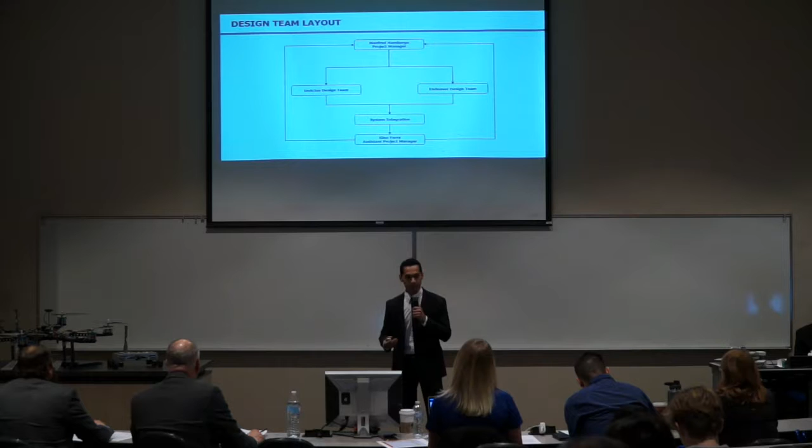As mentioned in the introduction, our mission is Rogue One, which stands for Reconnaissance Operation for Guided Unmanned Exploration 1. Our mission purpose is to develop an unmanned aerial vehicle that will transport a reconnaissance vehicle to a remote location. It will survey it, then return to the aerial vehicle, and together they'll return to the starting location. For our mission, there are three corresponding systems.

It's the ground station system that we'll be talking about today during this presentation. We have our Vesta system, which is our hexacopter over here on my right; this system will be covered at 9:15 today. And finally we have our Aura system, which is our rover, also here on my right, which we'll cover at around 10:15 a.m.

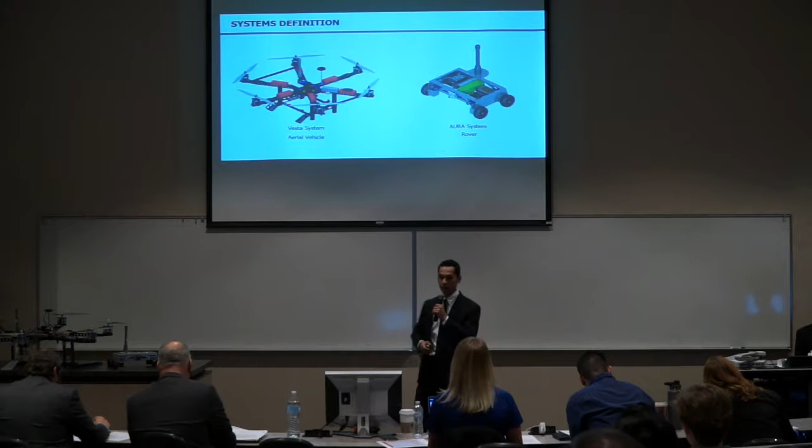For our mission, we have developed 8 primary objectives that dictate the progress of our mission and the progress we have to take with our vehicles. Starting with, the Aura and Vesta systems should be initiated at the center of the Mos Eisley spaceport, which we refer to as the location where both vehicles will start the mission.

Our Vesta system, our hexacopter, should transport the Aura system to the Yavin 4 ruins, which we refer to as our operations area. At this point I hope you're all familiar with these terms—we are very fans of Star Wars, so we adopted a lot of their names.

Our third objective is that the Aura system should be deployed after the Vesta system has landed in an approved landing area. The Aura system should navigate the operations area, generate detailed images, transmit the visual data to the ground station, and then return to the Vesta system after this data has been transmitted.

Finally, we have our Vesta system that should transport the Aura system back to the starting location after the Aura system has returned to it.

We also have 4 constraints for our project that dictate the limits within our project. For example, our cost will be less than or equal to $3,800, a total mission duration less than or equal to 60 minutes. The Vesta system will land in a grassy portion of the operations area, and the Aura system will only navigate that grassy portion in the operations area.

Now I would like to introduce you to our concept of operations. This is a simulation we've developed to represent the progress of our mission, starting with phase 1, our pre-flight phase. During this phase, we'll have all of our systems—could you play the video, please?

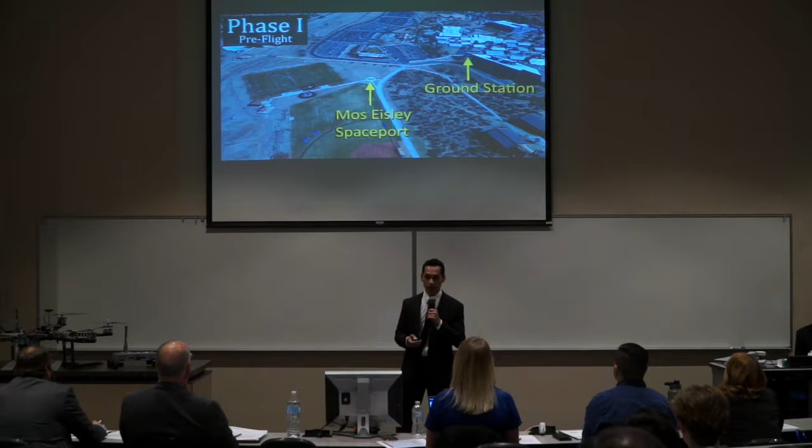Thank you. So we have our locations that I just described. Our ground station will be located here in the conference room in this building, where we set up all the equipment that belongs to the ground station and that will allow us to communicate with our vehicles. The Mos Eisley spaceport, as I mentioned, is where both vehicles will be set up and will start the mission.

Our Yavin 4 ruins is the operations area that the Aura vehicle has to transmit video from. And we have this hyperlane marked here with 2 lines that depicts the bounds that the Vesta system has to fly within.

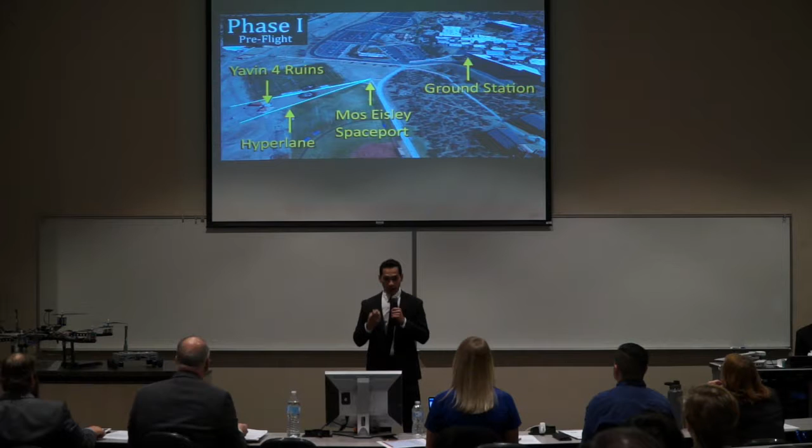Moving on, we have our Phase 2 of our concept of operations, the transport to Yavin 4 ruins. In this phase, the Vesta system takes off from the starting location while carrying the Aura system, and they will navigate or fly through the hyperlane that was just mentioned to land and softly land.

I should emphasize on that—softly land, so that it can deploy the Aura system.

Phase 3 is the deployment of Aura. Through our safety mechanisms, there is a setup of servo motors with foam blocks that lock the Aura system in place. They will be released, and then the Aura system can drive out of the payload bay.

Our Phase 4 is the reconnaissance of the Yavin ruins. This is just a simple area that we reconnoiter, and while transmitting visual data, we have a camera mounted on the rover that will be providing the visual images for the operator to manually navigate the operations area. Once it's done, it can find objects of interest that we're interested in.

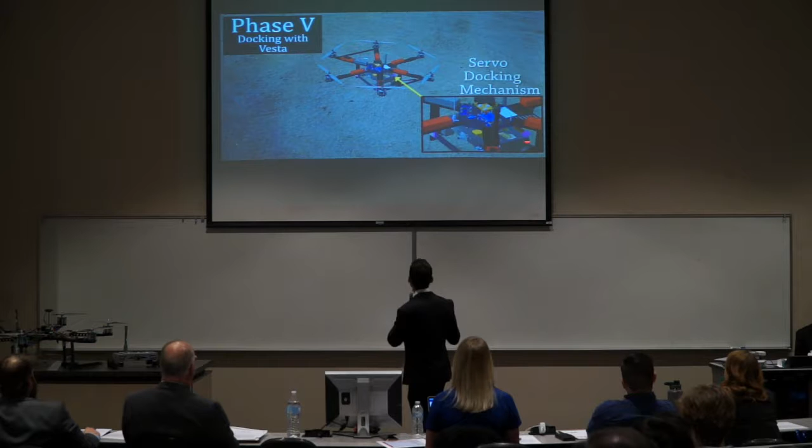In Phase 5 is the reverse process of Phase 3. It just has to dock with Vesta again by driving up the payload bay in the Vesta system, and then will be locked into place with the same mechanism in reverse. The servo motors will just lock in place to hold the Aura system during flight.

Phase 6 is the reverse process of Phase 2, a return to the starting location. Through the same hyperlane, the Vesta system will perform a second flight to bring back the Aura system to the starting location. Also, it will finish with a soft landing.

And finally, our Phase 7 is our post-flight phase. At this point, we disassemble all the systems, we're done with our mission, and we're ready to analyze the data.

Now, our mission history. During the following slides, I'll be presenting you with some changes that we had to perform to our mission due to setbacks, issues, or problems that we encountered during our project.

For example, our first two objectives that I presented a minute ago, which dictate the location we're going to use for our operations area and our starting location, had to be modified due to the following reasons that I will take you through. Our mission location 1 is very similar to what we ended up doing, with the exception that we planned for this location for 28 weeks.

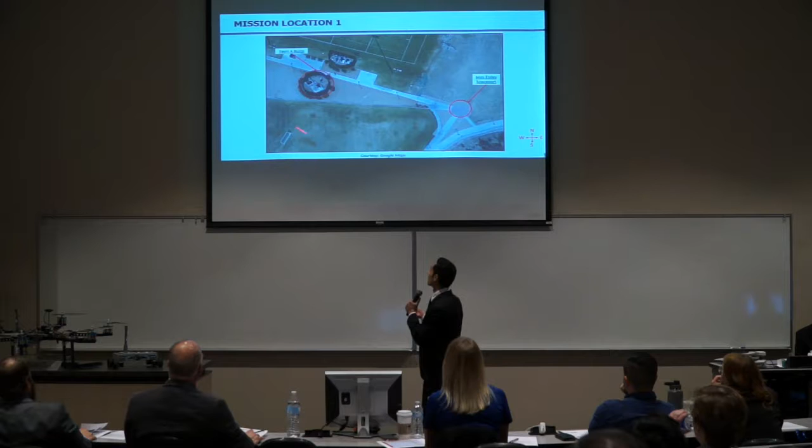We designed our system to take off from this area to land in this enclosure, and then we would be reconnoitering. Unfortunately, the facilities department denied the use of this enclosure due to concerns for damaging their equipment.

Again, I would like to emphasize that we designed for 28 weeks our project for our vehicles to operate within those bounds, and we were not able to use it.

So we came up with other suggestions and proposals, such as mission location 2, which is also within campus enclosures. We have our new landing site and our new starting location in the Spurance House. This is a house that is available for guests at the university.

This is a storage location that they use for facilities as well. This was a perfect area, also next to the house of the Chancellor. We have a pretty good view of our vehicles. This was a perfect location.

Unfortunately, our ground station system was designed to communicate at the initial area that I just presented, but for this location, it couldn't secure a link for connection with our vehicles.

So we were forced to move again with our location. Location 4 was the soccer field. We again had a proposed takeoff and landing area, and unfortunately we were not authorized by the athletics department to use this location.

I should mention that, as you can see, all of these locations are within the campus enclosure. Our decision for these locations was that we wouldn't like to be liable for any damages to people or property if we were to perform our mission outside of campus.

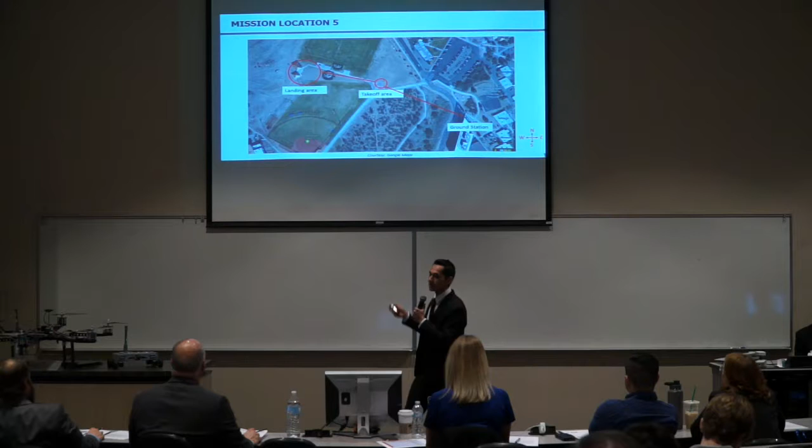And we just pushed the landing area over to this side, which was a publicly available area for us to use.

Now, our systems also have their own history. For our vehicles, mainly, we went through a series of modifications and changes that we had to perform due to testing, analysis, and simulations that we came up with to solve problems that we encountered. So, for example, beginning with the Vesta system, the hexacopter, it started with version 1, our very first CAD model of the Vesta system. It was an octocopter that was just capable of taking off and carrying the AURA system.

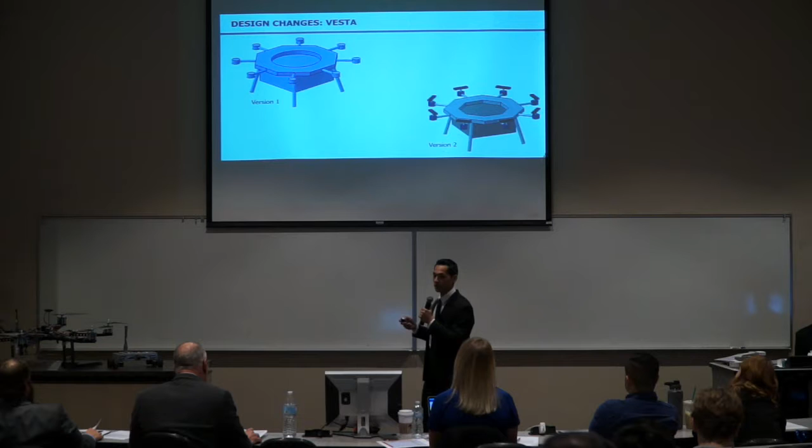Version 2, we decided on the selection of electric motors and propellers for our propulsion system, and we also have a payload bay for the AURA system. Version 3 focused on designing an accessible payload bay for the AURA system. Version 4 refined the aerial structure and the landing legs.

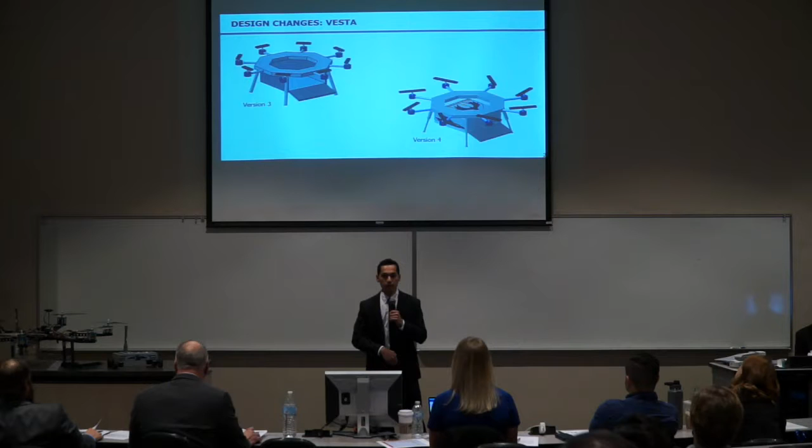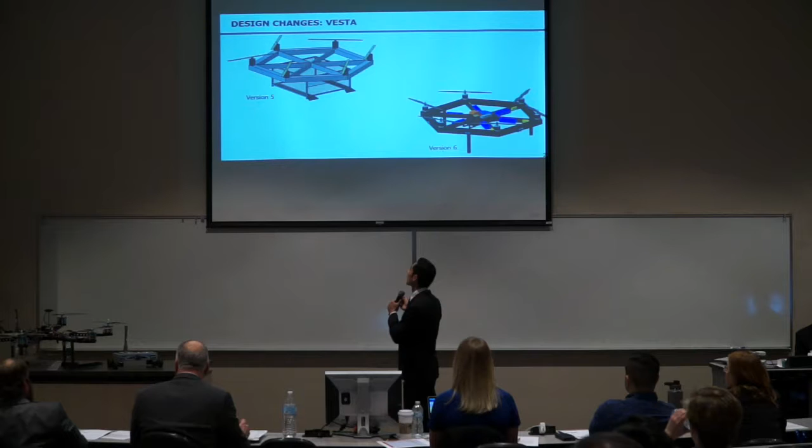Version 5 went from an octocopter to a hexacopter and focused on a closed shape for the aerial structure, and also a lightweight payload bay for Vesta for the AURA system. Version 6 focused on the weight problem, so we went with a carbon fiber layout for the structure, and we replaced the payload bay with a set of hooks that would be able to engage the AURA system.

Version 7 and 8 come closer to our final product, where we settled on a design for a payload bay and the electronic equipment layout in both cases. Version 9 presents the final selection for the set of electric motors and propellers in our CAD model, and version 10 added a couple of other components: a flight controller, a Pixhawk, and a GPS module.

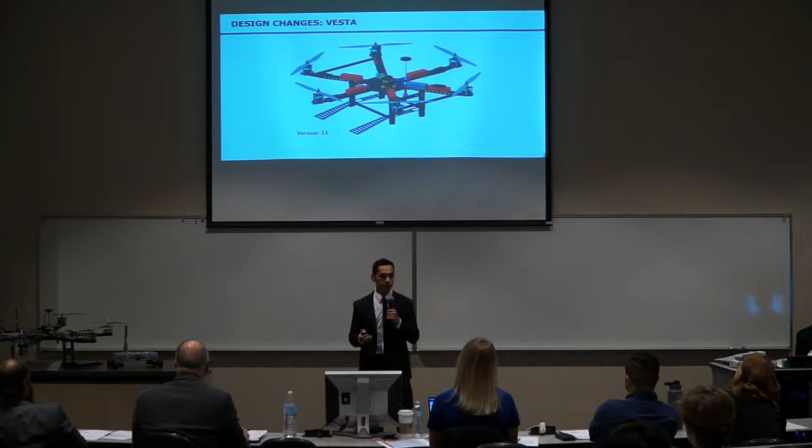And finally, our version 11 is our final CAD model for our Vesta system, and as you can see, we also added a couple of struts in the T-beam arms and holes in the aerial structure to reduce weight and provide stability to our vehicle.

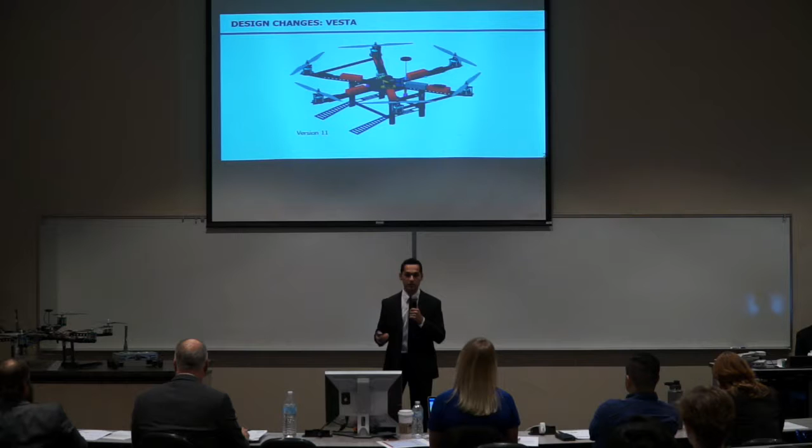We also have some changes for our rover, or AURA system. In version 1, we have our very first CAD model for our rover. It just consisted of a 4-wheel rover equipped with a camera capable of transmitting visual images. Version 2 has a different physical structure, settling on wheels and stepper motors for our traction.

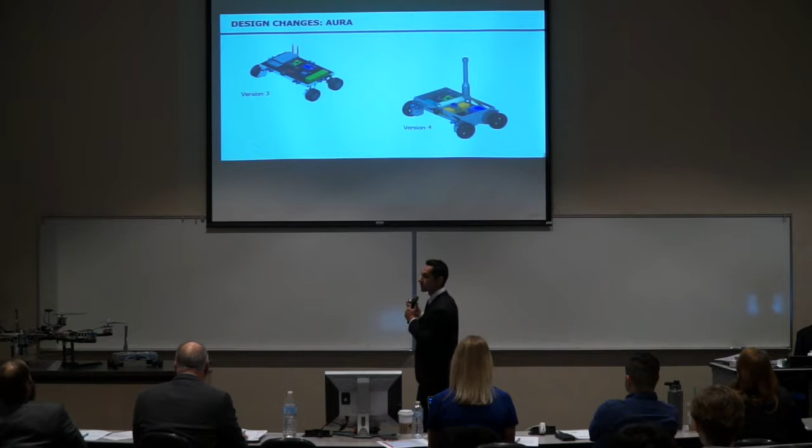Version 3 focused on the layout of the electric equipment, and as you can see, we have a modem and an antenna for the communications that were later replaced in version 4 with a more powerful antenna and a more lightweight modem. Finally, we have versions 5 and 6 that are very similar, where we settled on the camera decision and some weight reduction in our physical structure.

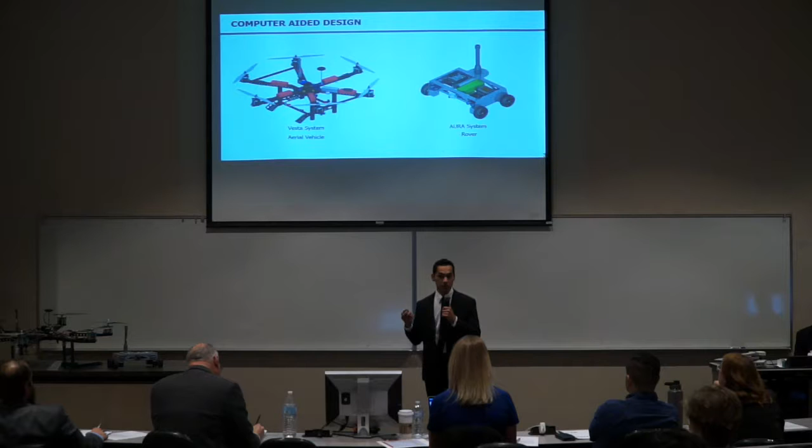Now, as a comparison, I presented our final CAD models for each one of the vehicles, the Vesta on the left and the AURA on the right. The following picture is a comparison with our final products that were fully fabricated and assembled. We also have them here on our table, so if you want to inspect them a little bit more in detail, we can do so at the end of this presentation. Now I'd like to pass it on to my colleague Gino Ferrer to talk about our configuration management.

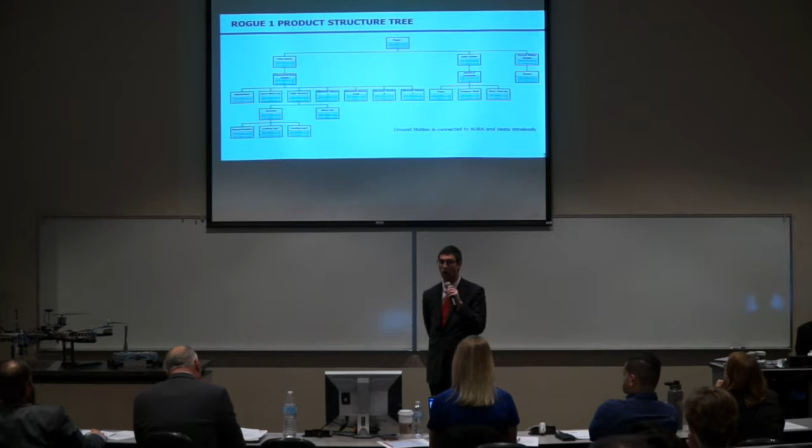Thank you, Manfred. Shown here is our product structure tree. The product structure tree shows how all of our systems were designed and assembled from the bottom upwards. Each box here represents a sub-assembly. All of these sub-assemblies have 2 partitions, one being the bill of materials and an assembly drawing. A bill of materials is a list of all parts used within that sub-assembly, and an assembly drawing shows how those parts are fit together.

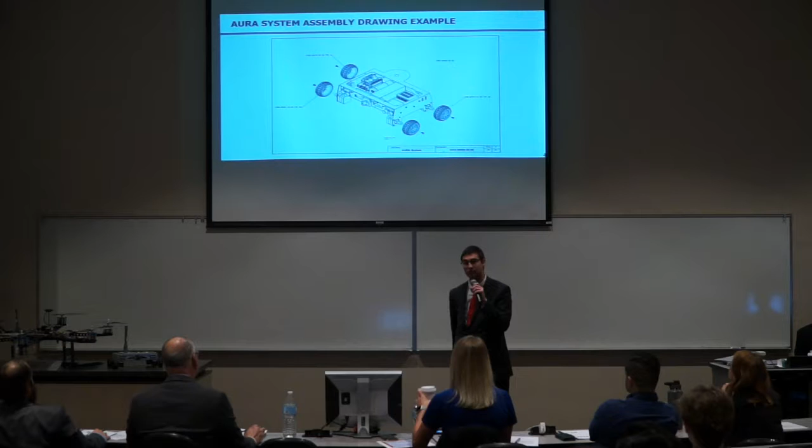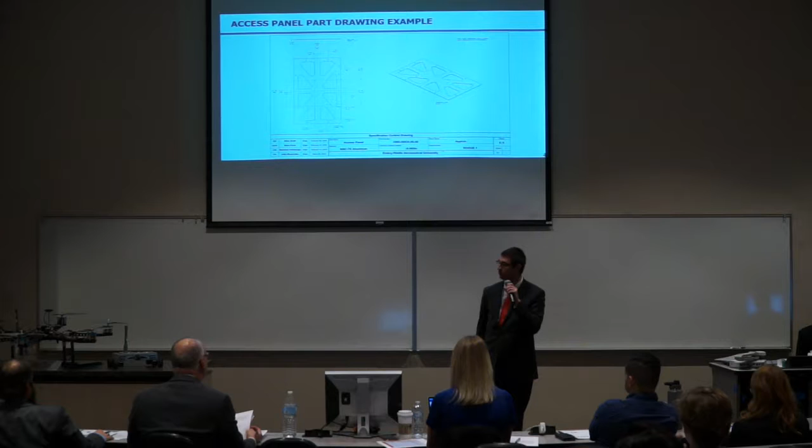Here's another example of an assembly drawing. This is an assembly drawing of the AURA system. This shows how the wheels were attached to the AURA system, and here's its corresponding bill of materials. Here is a part drawing. We have over 150 parts within both systems. This is the access panel for the AURA system. It's what fits on top of it.

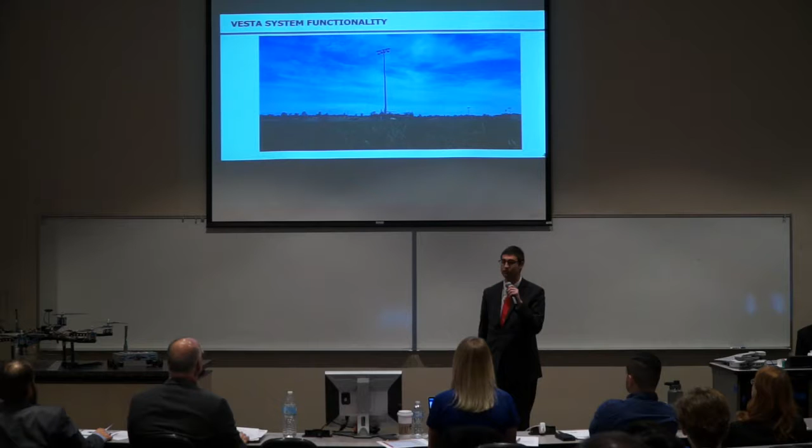Here's one of Vesta's first VTOL tests. In this video, Vesta lifts off the ground to its required height, and then after about 30 seconds of hovering, it safely returns to the ground.

Next, we have Vesta's crash. Unfortunately, last Friday, Vesta, don't play it yet, please. Unfortunately, Vesta lifted off very quickly. After a matter of seconds, it became unstable and crashed to the ground. Now, please play it. Since this happened last weekend, we did not have enough time to rebuild and retest, so we had to move forward with analyzing this. This will be covered in more depth during Vesta's presentation at 9:15.

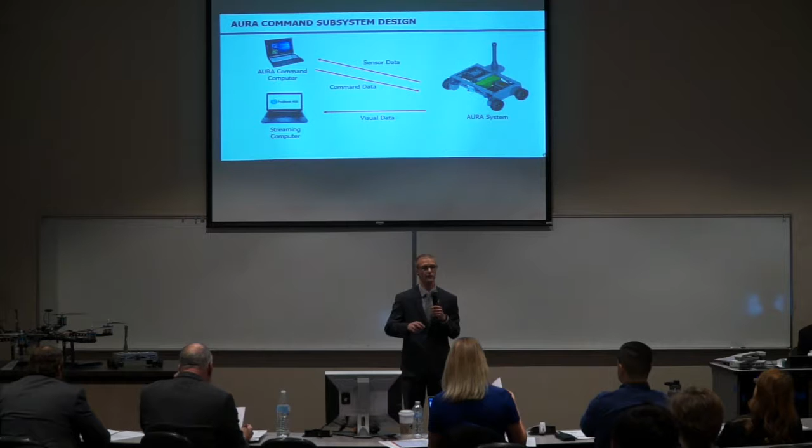An example of the streaming computer is shown. So the Aura system camera comes with a program called GeoVision, and that displays that video feed for us. To access GeoVision, you simply open Internet Explorer, type in the IP address of the camera, and that'll pull open this page that shows the video feed from the Aura system.

To save that video feed, we used an application called Windows Gaming Bar, which records a video, and later we could go frame by frame to get individual photos from it. We have an example of the sensor display of the Aura system. So similar to the Vesta system, we were able to SSH into the Aura system and run a sensor program. So this displayed the sensor data of the Aura system and continuously updated until it was terminated by user input.

And then we also were able to run a program that accepted user input. This program accepted translation, rotation, throttle, and stepper count, which was sent to the stepper motors on the Aura system and was used to maneuver the vehicle. So in summary, all of the objectives for the Aura Command subsystem were satisfied. And now I'd like to welcome up Michael Fusco to talk about the communication subsystem.

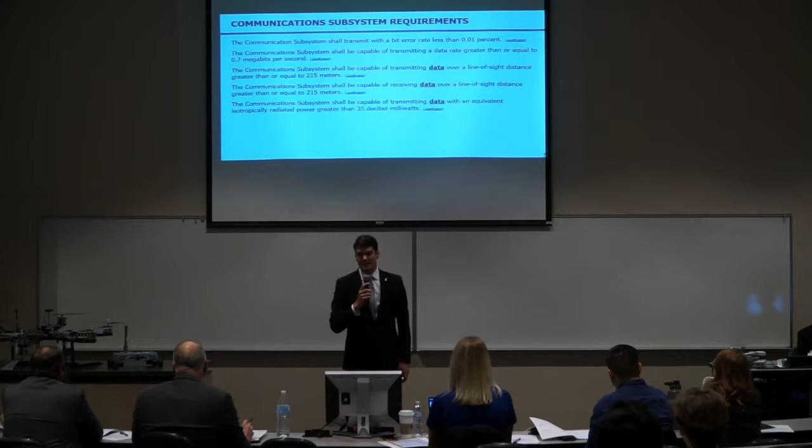The subsystem shall be capable of transmitting and receiving data over a line of sight distance greater than or equal to 215 meters. And finally, the subsystem shall be capable of transmitting data with an equivalent isotropically radiated power, or EIRP, greater than 35 decibel milliwatts, or dBm.

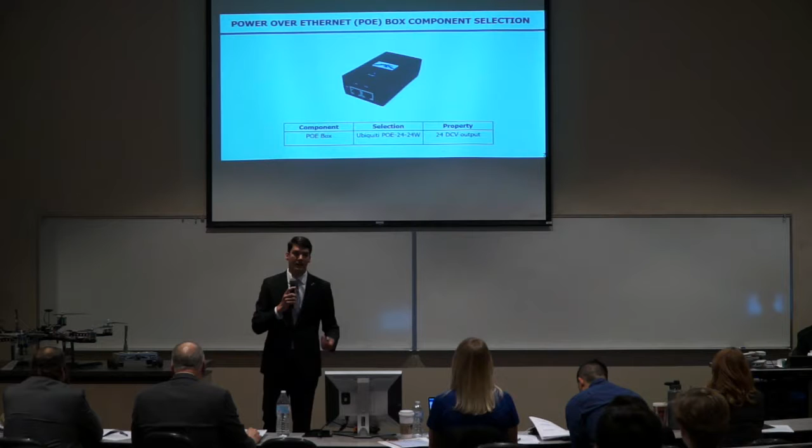That Ethernet line is taken in on the left and connects to an antenna on the right through an N-type connector. The modem serves to modulate and demodulate network signals for transmission and reception, and when combined with the antenna, creates an access point to the WLAN. The selected component through Ubiquiti Networks has a transmission power of 28 dBm.

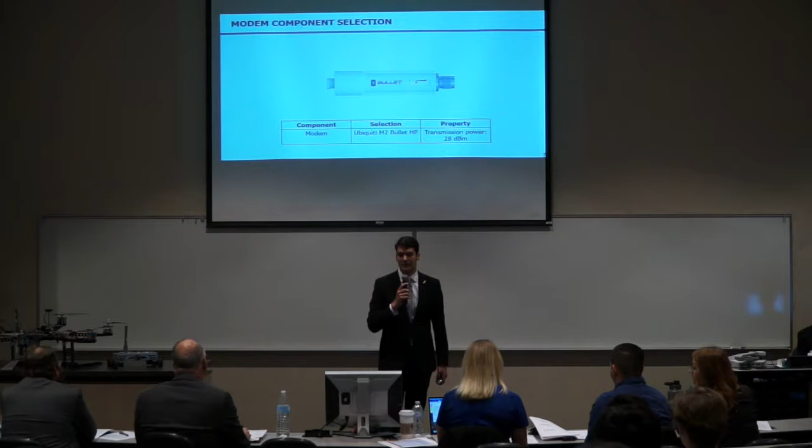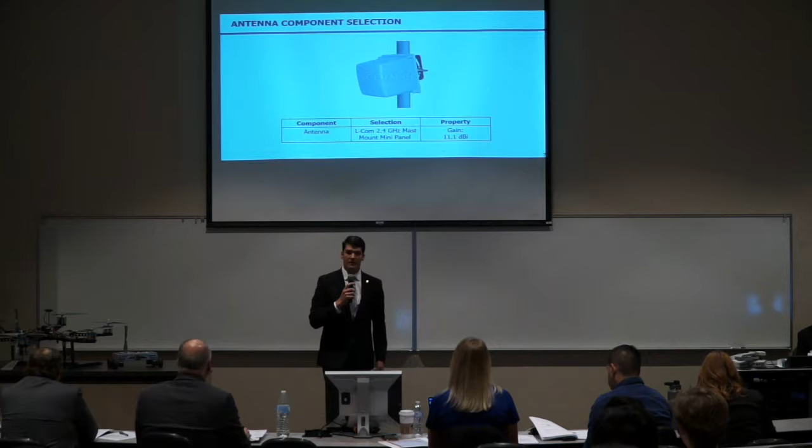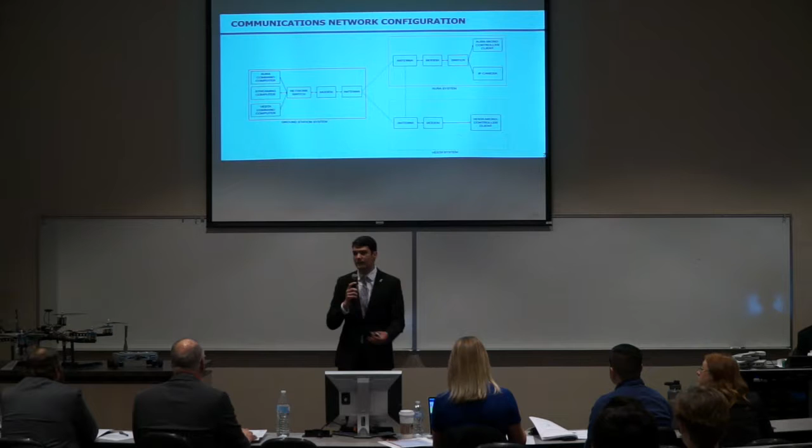The antenna selection is a panel antenna which provides for directionality and therefore has a large gain of 11.1 dBi. Shown here is the communications network configuration for the system of systems, with the ground station shown on the left. The access point of the ground station can connect to the access points created by the modem antenna combinations on the vehicles. The feature of this network is that we can connect either directly to the vehicles, or we can use one of the vehicles as a relay to the ground station, which is particularly useful for when ORA performs the reconnaissance mission.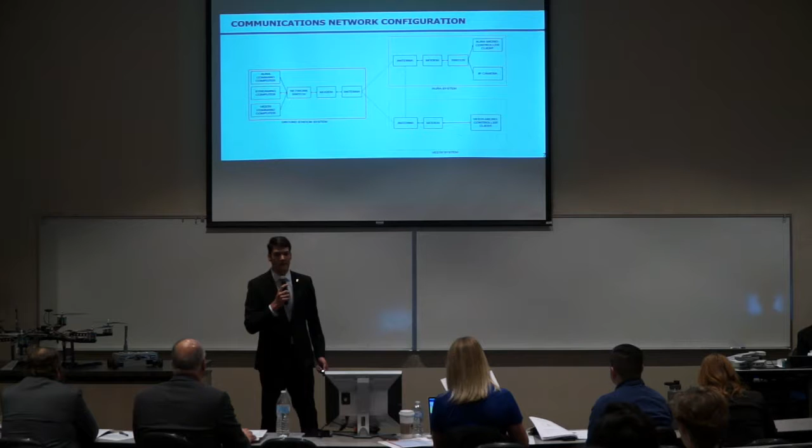In order to numerically validate the requirements, we performed a network performance test. We first set up an access point of the vehicle 215 meters away from the ground station location, which was on the roof of this building due to scheduling constraints with the conference room. We used a software called airOS, which comes with the modem in order to determine signal parameters, including frequency, bandwidth, transmission power, signal strength, and noise floor.

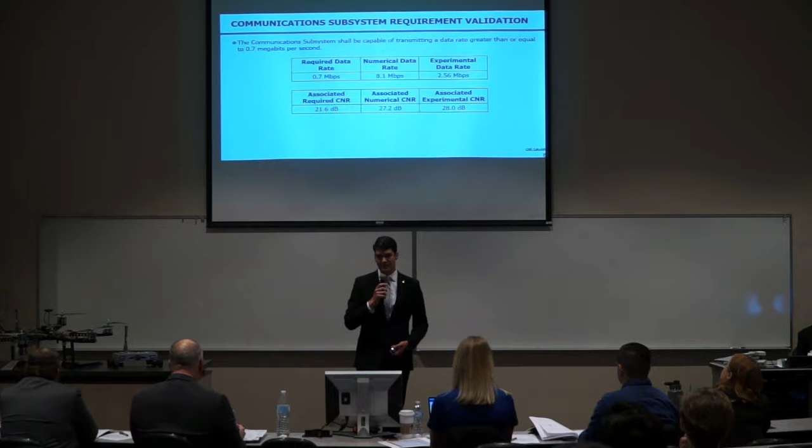In order to validate the data rate requirement of 0.7 megabits per second, we calculated our CNR to be 27.2 dB, which was greater than the required 21.6 to deliver our network performance. Therefore, we assumed that we could deliver the full data bandwidth of 8.1 megabits per second. Experimentally, we were able to transmit a maximum of 2.56 megabits per second, thus both numerically and experimentally validating this requirement.

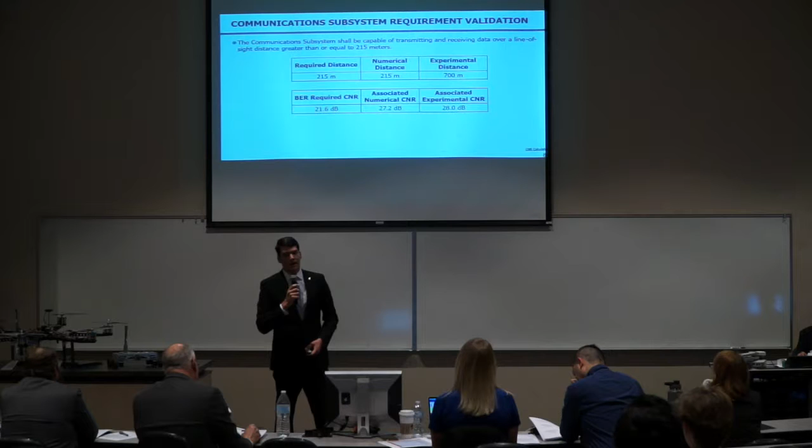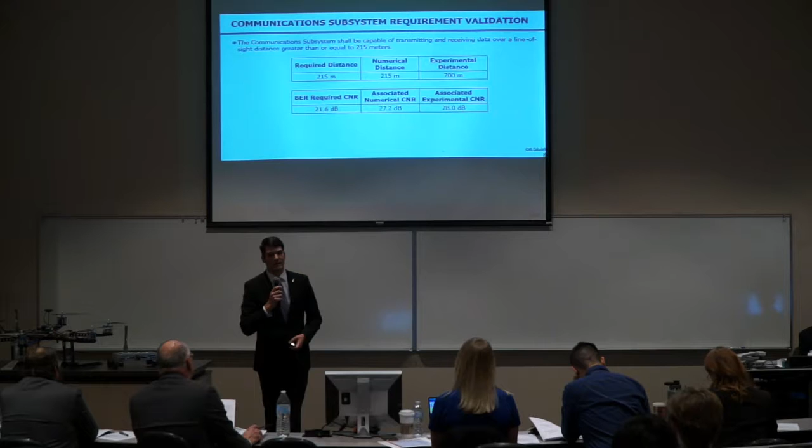The line of sight distance requirement was also validated through the carrier to noise ratio calculation. We used the required 215 meters in calculating CNR, and also found it was greater than the required CNR for bit error rate. In practice, we found that the experimental CNR was 28 dB, and we suspect that it's slightly larger because we used a conservative estimate for loss in calculating CNR. So with the experimental CNR, we are able to correlate that to a 700 meter transmission reception distance.

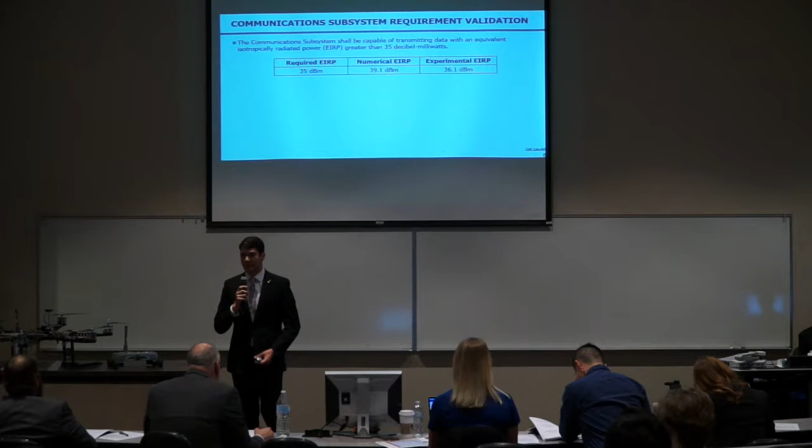Finally, the requirement associated with EIRP was numerically and experimentally validated. EIRP is the transmission power plus the gain of the antenna. The numerical result is greater because the specification sheet for the modem listed 28 dBm, and that was for BG type wireless protocol. However, we used N-type, which had a maximum transmission power of 25 dBm. So it was less, but it still met the required 35 dBm. So in summary, all 5 requirements were both numerically and experimentally validated.

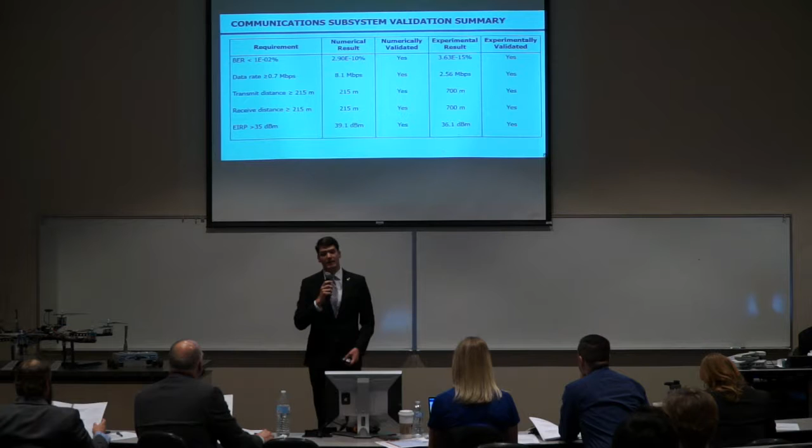And now I will show a video that demonstrates the objectives for the communication subsystem corresponding to the ORA system were satisfied. This video will show the ORA system undocking from the Vesta system, and the video stream was received at the ground station remotely, and a user commanded the vehicle out of the Vesta system. And Benedict will begin the video.

At several points in this video, you may see that it pauses. This is due to the fact that the operator stopped the vehicle to make maneuver decisions. It is not a result of the video stream being interrupted. The speed is 1.5 times.

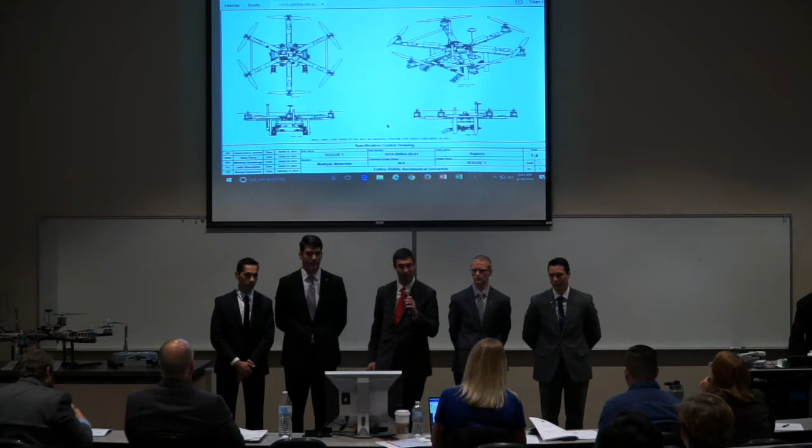So as for the first question, we don't have many views of the systems integrating together because it just drives into the payload bay. But if you open the first assembly drawing for the Rogue One system, on the next page there are examples of how exactly it fits together. So if you build the Aura and Vesta to spec, then it was assumed that the integration would come together and work. Yes, which it did.

We had a lot of communication among both teams, with one team developing the hexcopter and another team developing the rover. We were in constant communication to remain on the same page with our dimensions, our weight constraints, our current updates. We had very, very good communication. I love to hear that, communication is very important. And keep in mind, in the professional world, when it's not just an in-house project, you have to define those interfaces because you're typically working with a different vendor who's providing the rover or so on. But communication is good.

Nice job. I have a couple of questions. First one was, for the bit error rate, why was the value of 0.01% chosen? This was mainly after consulting our EE professor, Dr. Suleiman, and the main reason is that, well, it was mainly through consultation.

So I want to get to the systems engineering aspect of it. Customers will often have requirements and provide values, and your job when you're designing and responding to those is to understand why they're coming at it. I certainly saw that you guys met all your requirements, but a lot of you had huge margins in some areas, like communication, bit error rates. So that's great, but understanding the intent and rationale for requirements is just as important as understanding the shall statement that's provided. So that's something to keep in mind.